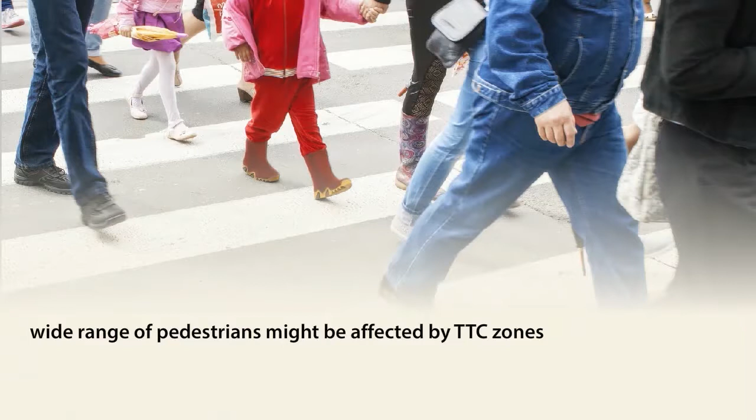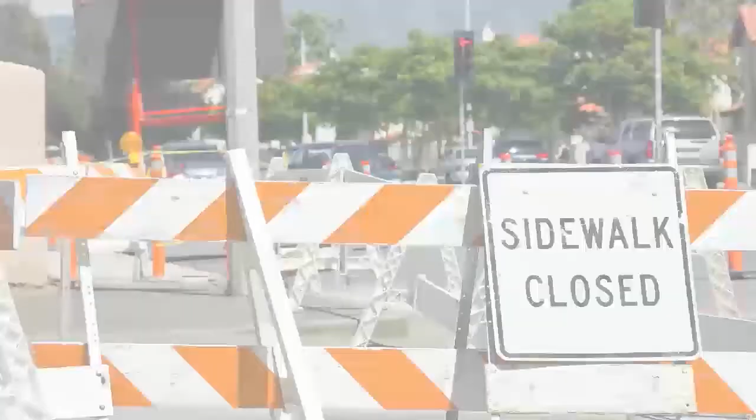A wide range of pedestrians might be affected by TTC zones, including the young, elderly, and people with disabilities, such as hearing, visual, or mobility. These pedestrians need a clearly delineated and usable travel path. The various TTC provisions for pedestrian and worker safety set forth in this course shall be applied by knowledgeable persons after appropriate evaluation and engineering judgment.

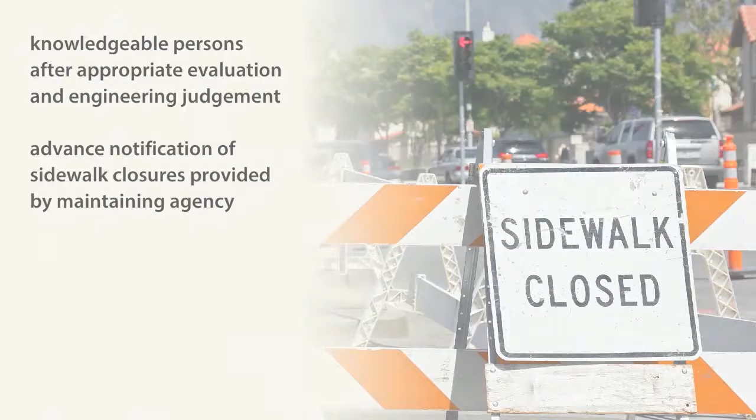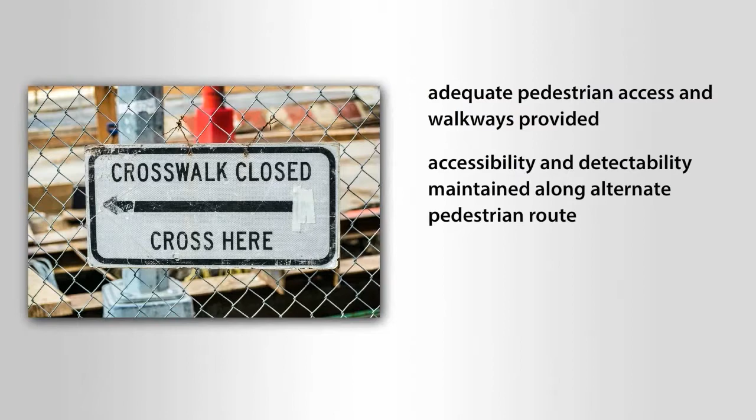Advance notification of sidewalk closures shall be provided by the maintaining agency. If the TTC zone affects the movement of pedestrians, adequate pedestrian access and walkways shall be provided. If the TTC zone affects an accessible and detectable pedestrian facility, the accessibility and detectability shall be maintained along the alternate pedestrian route. If establishing or maintaining an alternate pedestrian route is not feasible during the project, an alternate means of providing for pedestrians may be used, such as adding free bus service around the project or assigning someone the responsibility to assist pedestrians with disabilities through the project limits.

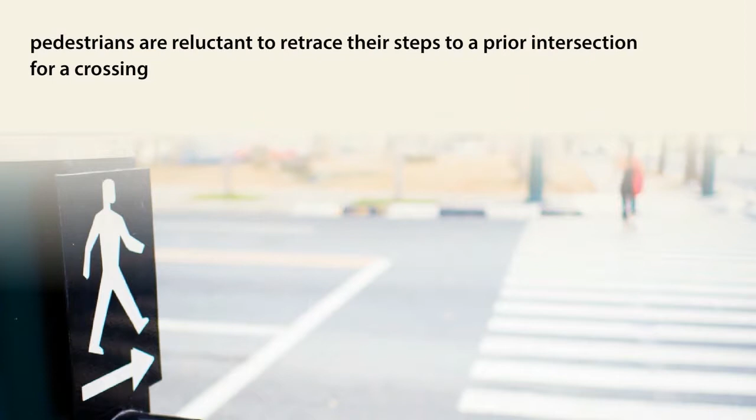It must be recognized that pedestrians are reluctant to retrace their steps to a prior intersection for a crossing or to add distance or out-of-the-way travel to a destination. The following three items should be considered when planning for pedestrians in TTC zones.

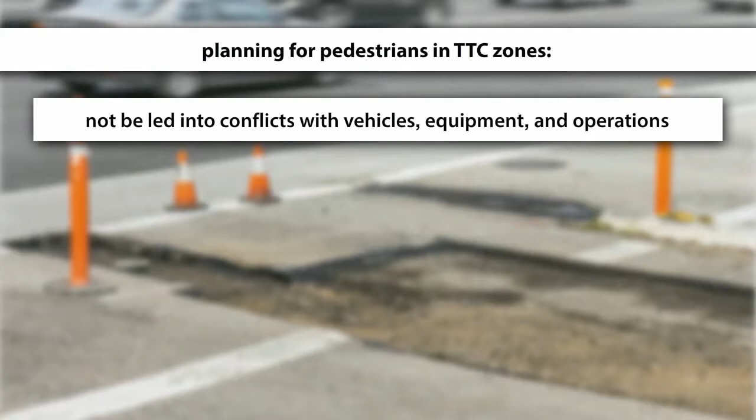One, pedestrians should not be led into conflicts with vehicles, equipment, and operations. Two, pedestrians should not be led into conflicts with vehicles moving through or around the worksite. Three, pedestrians should be provided with a convenient and accessible path that replicates as nearly as practical the most desirable characteristics of the existing sidewalks or footpaths.

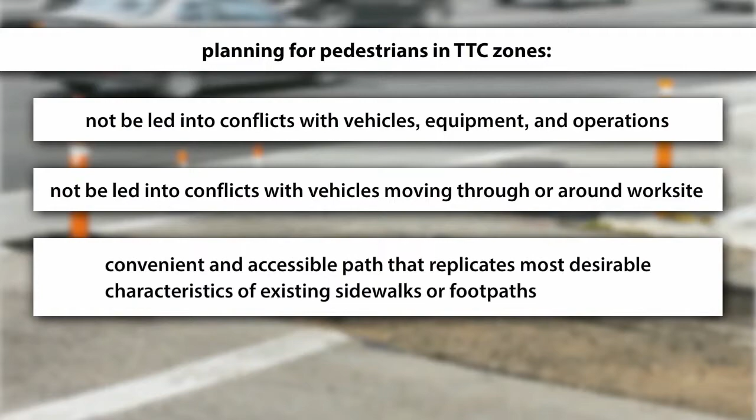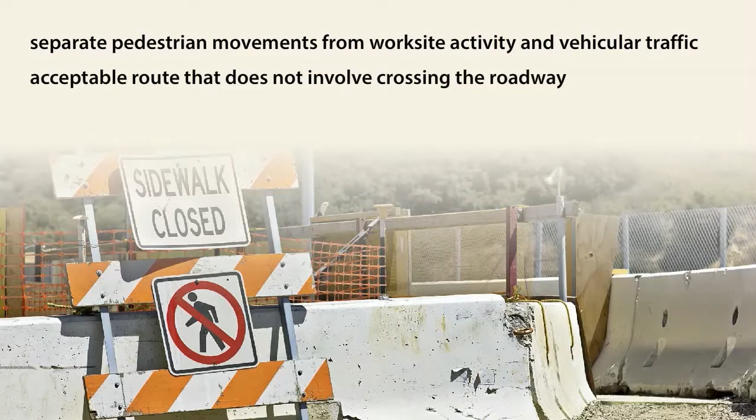A pedestrian route should not be severed or moved for non-construction activities, such as parking for vehicles and equipment. Consideration should be made to separate pedestrian movements from both worksite activity and vehicular traffic. Unless an acceptable route that does not involve crossing the roadway can be provided, pedestrians should be appropriately directed with advanced signing that encourages them to cross to the opposite side of the roadway.

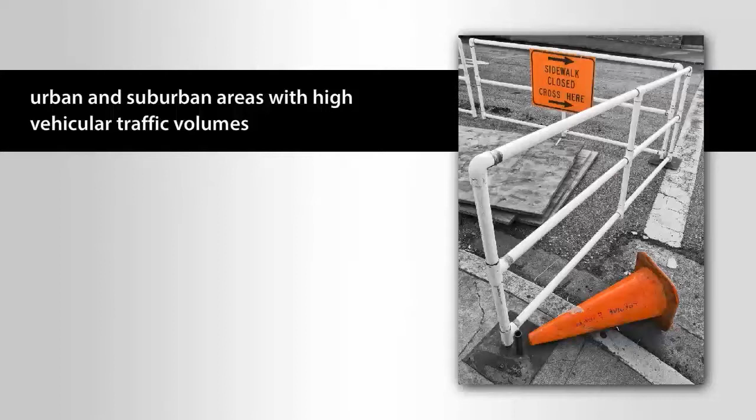In urban and suburban areas with high vehicular traffic volumes, these signs should be placed so that pedestrians are not confronted with mid-block worksites that will induce them to attempt skirting the worksite or making a mid-block crossing.

These figures show typical TTC device usage and techniques for pedestrian movement through work zones. You can press the Documents button to view these images in more detail.

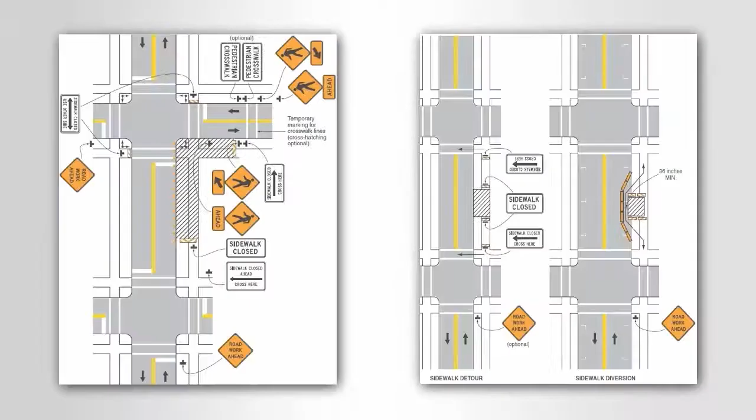To accommodate the needs of pedestrians, including those with disabilities, the following considerations should be addressed when temporary pedestrian pathways in TTC zones are designed or modified.

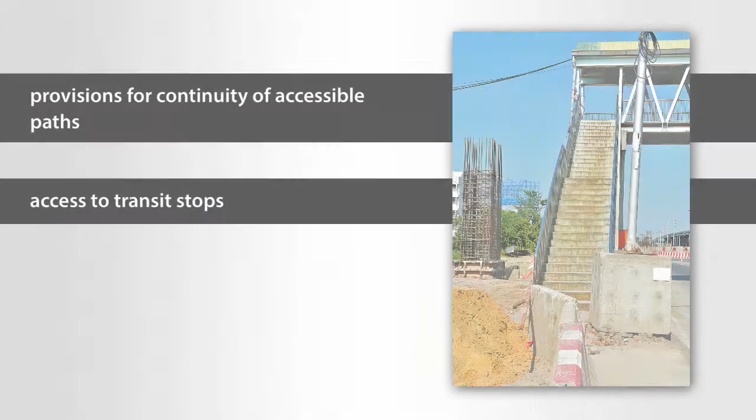A. Provisions for continuity of accessible paths for pedestrians should be incorporated into the TTC plan. B. Access to transit stops should be maintained. C. A smooth, continuous, hard surface should be provided through the entire length of the temporary pedestrian facility.

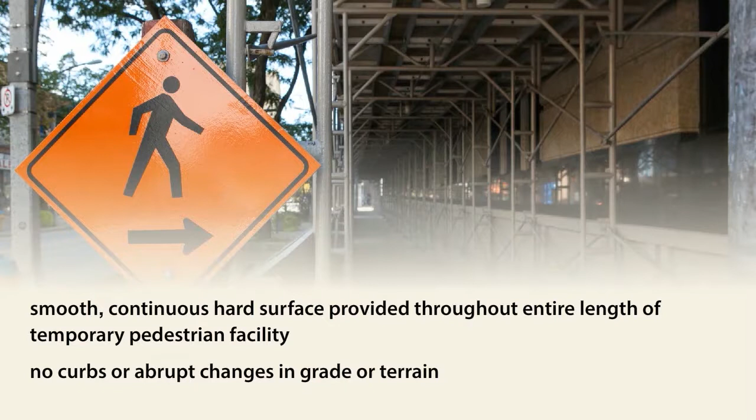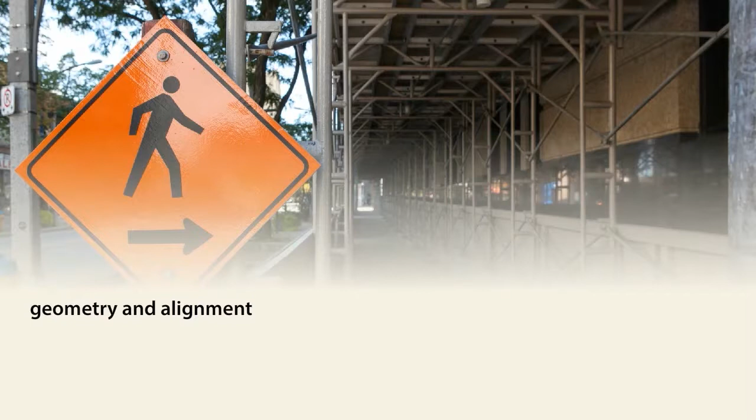There should be no curbs or abrupt changes in grade or terrain that could cause tripping or be a barrier to wheelchair use. The geometry and alignment of the facility should meet the applicable requirements of the Americans with Disabilities Act accessibility guidelines for buildings and facilities.

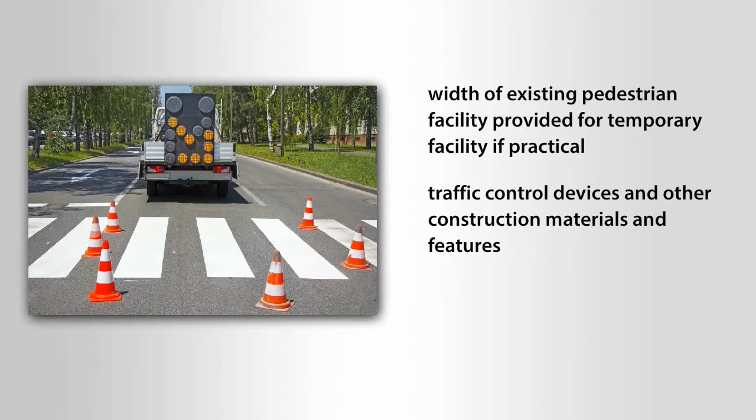D. The width of the existing pedestrian facility should be provided for the temporary facility, if practical. Traffic control devices and other construction materials and features should not intrude into the usable width of the sidewalk, temporary pathway, or other pedestrian facility.

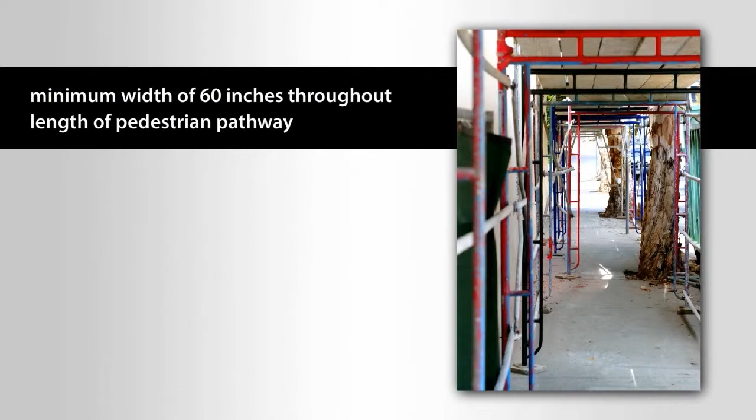When it is not possible to maintain a minimum width of 60 inches throughout the entire length of the pedestrian pathway, a 60 by 60 inch passing space should be provided at least every 200 feet to allow individuals in wheelchairs to pass.

E. Blocked routes, alternate crossings, and sign and signal information should be communicated to pedestrians with visual disabilities by providing devices such as audible information devices, accessible pedestrian signals or barriers, and channelizing devices that are detectable to pedestrians traveling with the aid of a long cane or who have low vision.

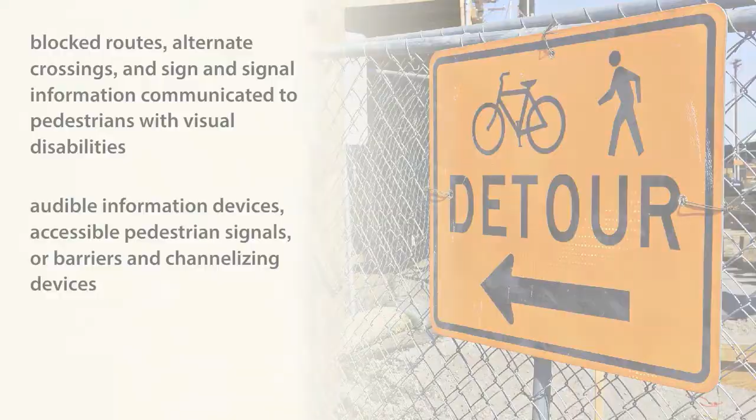Where pedestrian traffic is detoured to a TTC signal, engineering judgment should be used to determine if pedestrian signals or accessible pedestrian signals should be considered for crossings along an alternate route.

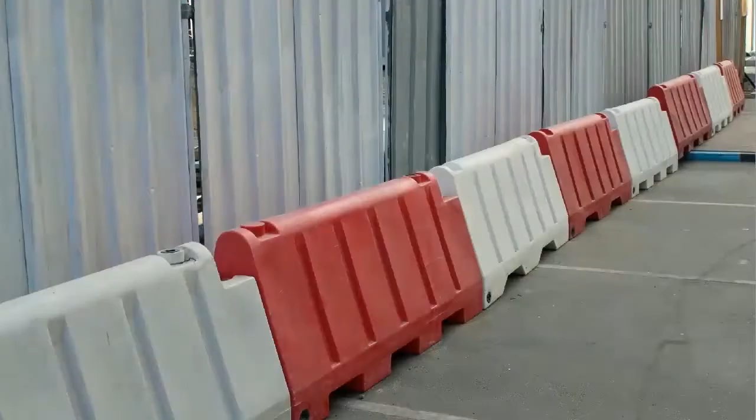When channelization is used to delineate a pedestrian pathway, a continuous detectable edging should be provided throughout the length of the facility such that pedestrians using a long cane can follow it.

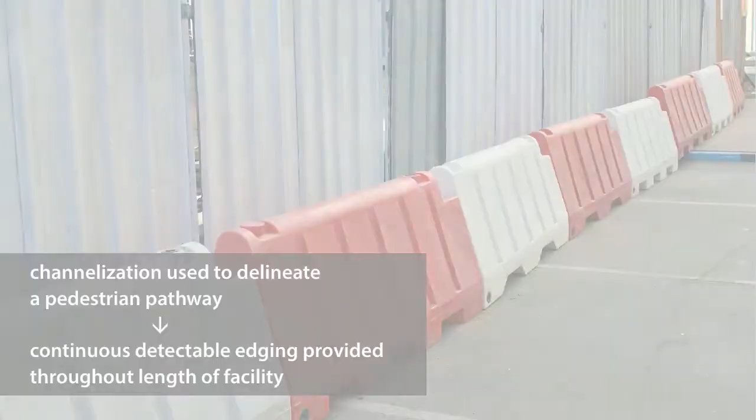Signs and other devices mounted lower than 7 feet above the temporary pedestrian pathway should not project more than 4 inches into accessible pedestrian facilities.

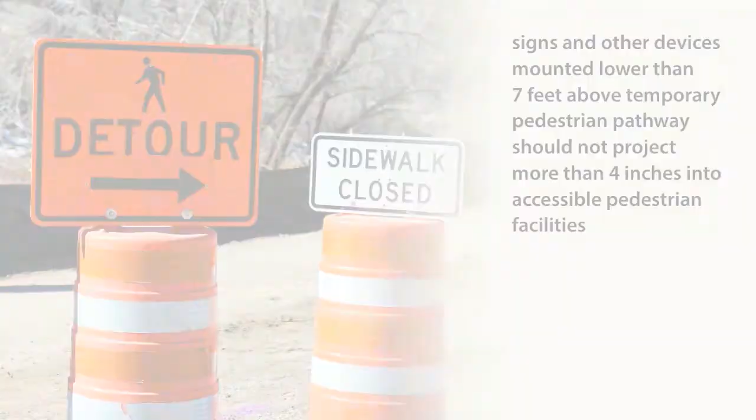Whenever it is feasible, closing off the worksite from pedestrian intrusion may be preferable to channelizing pedestrian traffic along the site with TTC devices. Fencing should not create sight distance restrictions for road users. Fences should not be constructed of materials that would be hazardous if impacted by vehicles.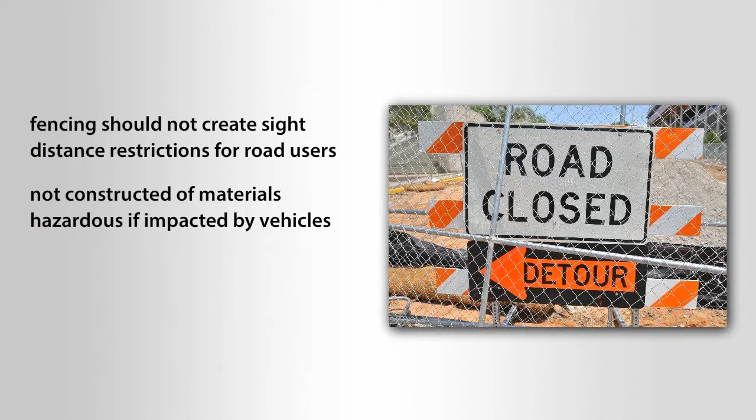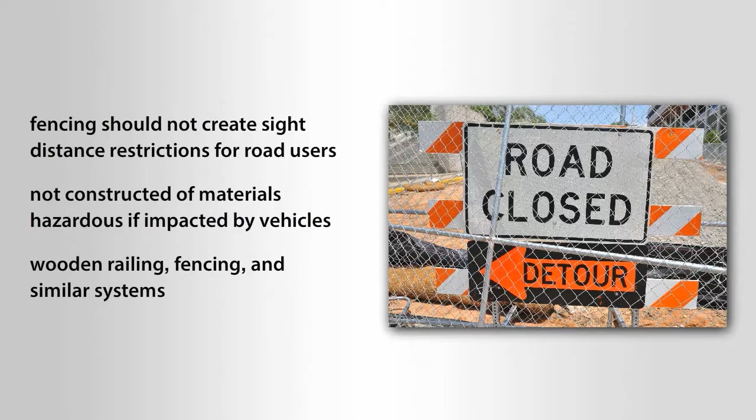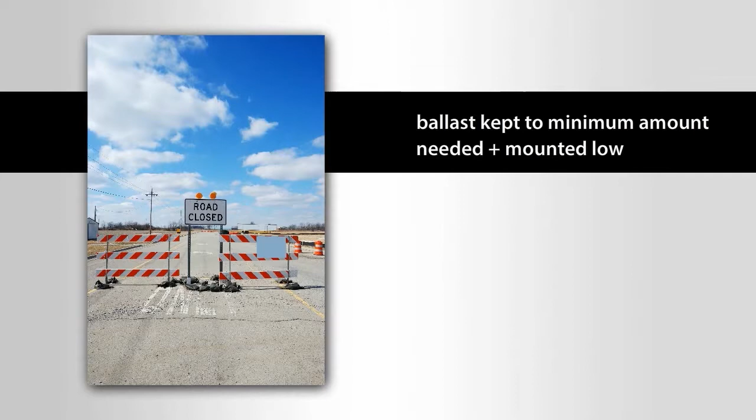Wooden railing, fencing, and similar systems placed immediately adjacent to motor vehicle traffic should not be used as substitutes for crash-worthy temporary traffic barriers. Ballast for TTC devices should be kept to the minimum amount needed and should be mounted low to prevent penetration of the vehicle windshield.

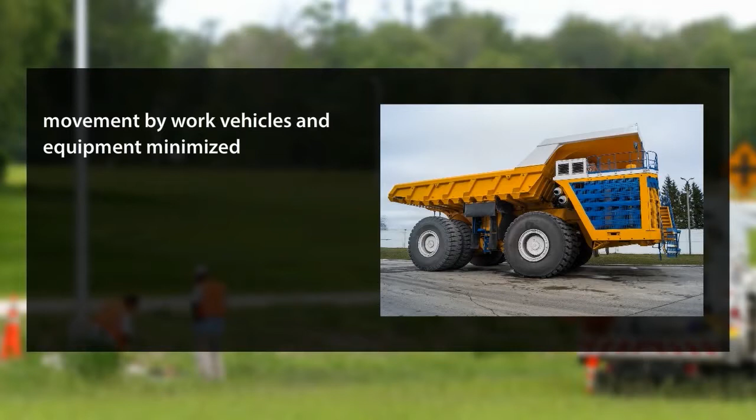Movement by work vehicles and equipment across designated pedestrian paths should be minimized and, when necessary, should be controlled by flaggers or TTC. Staging or stopping of work vehicles or equipment along the side of pedestrian paths should be avoided, since it encourages movement of workers, equipment, and materials across the pedestrian path.

Access to the workspace by workers and equipment across pedestrian walkways should be minimized because the access often creates unacceptable changes in grade and rough or muddy terrain, and pedestrians will tend to avoid these areas by attempting non-intersection crossings where no curb ramps are available.

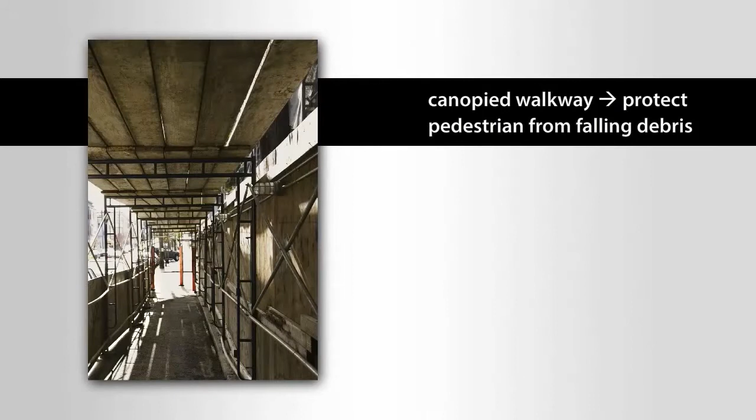A canopied walkway may be used to protect pedestrians from falling debris and to provide a covered passage for pedestrians. Covered walkways should be sturdily constructed and adequately lighted for nighttime use.

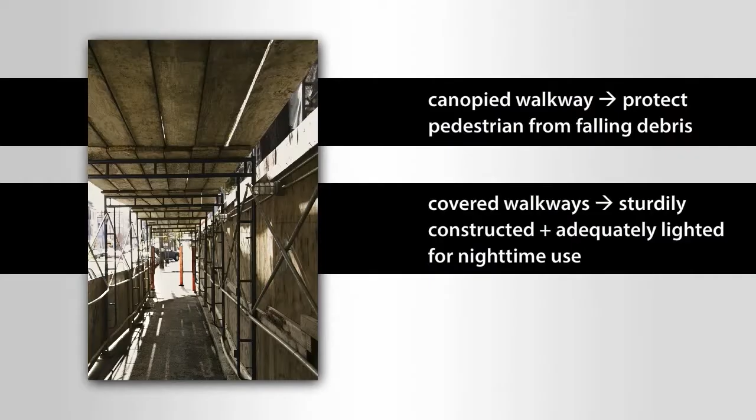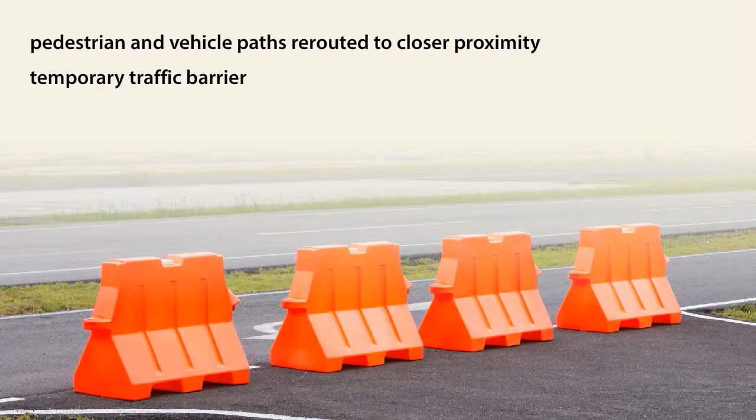When pedestrian and vehicle paths are rerouted to a closer proximity to each other, consideration should be given to separating them by a temporary traffic barrier. If a temporary traffic barrier is used to shield pedestrians, it should be designed to accommodate site conditions.

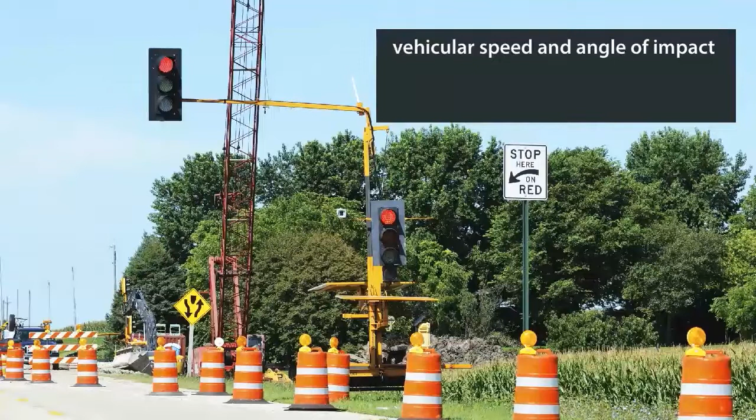Depending on the possible vehicular speed and angle of impact, temporary traffic barriers might deflect upon impact by an errant vehicle. Guidance for locating and designing temporary traffic barriers can be found in Chapter 9 of AASHTO's Roadside Design Guide.

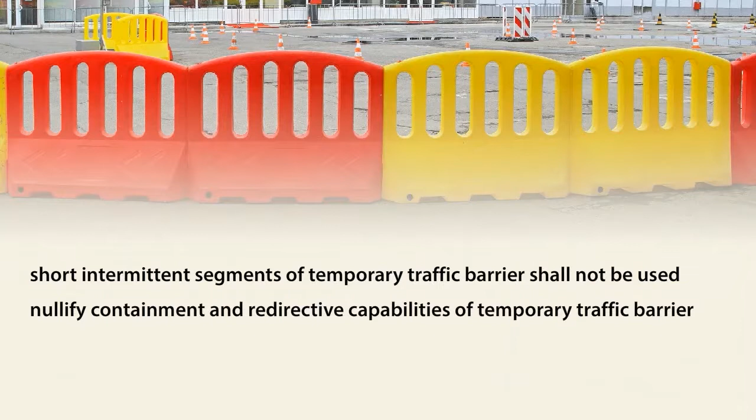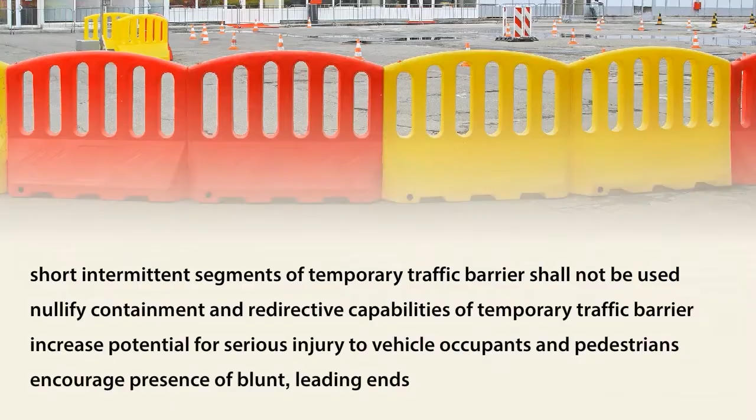Short, intermittent segments of temporary traffic barrier shall not be used because they nullify the containment and redirective capabilities of the temporary traffic barrier, increase the potential for serious injury both to vehicle occupants and pedestrians, and encourage the presence of blunt leading ends. All upstream leading ends that are present shall be appropriately flared or protected with properly installed and maintained crash-worthy cushions.

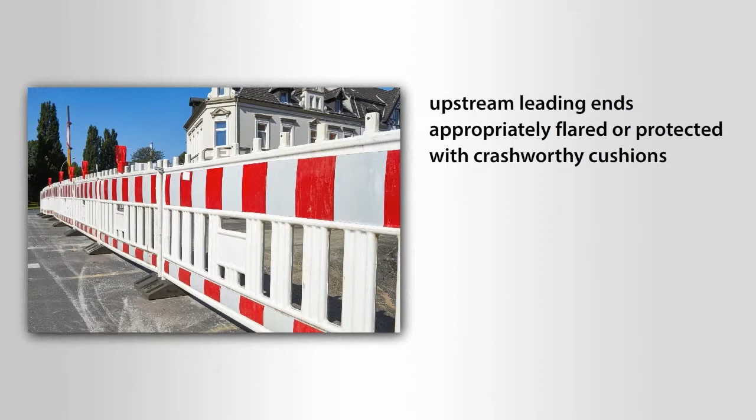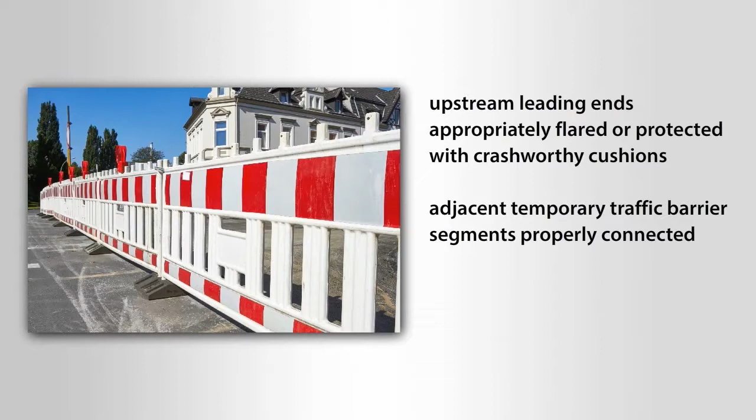Adjacent temporary traffic barrier segments shall be properly connected in order to provide the overall strength required for the temporary traffic barrier to perform properly. Normal vertical curbing shall not be used as a substitute for temporary traffic barriers when temporary traffic barriers are needed.

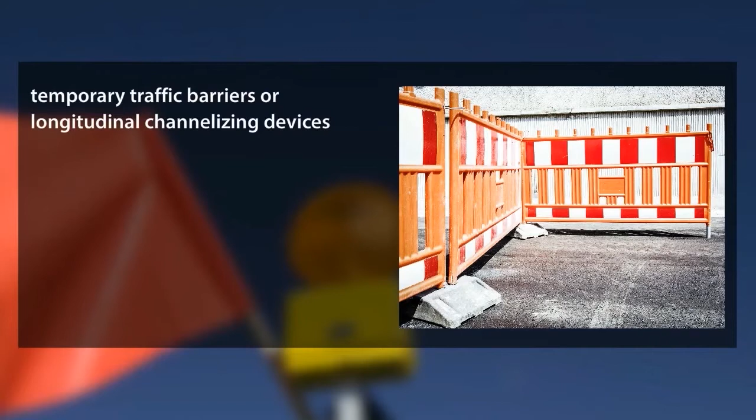Temporary traffic barriers or longitudinal channelizing devices may be used to discourage pedestrians from unauthorized movements into the workspace. They may also be used to inhibit conflicts with vehicular traffic by minimizing the possibility of midblock crossings.

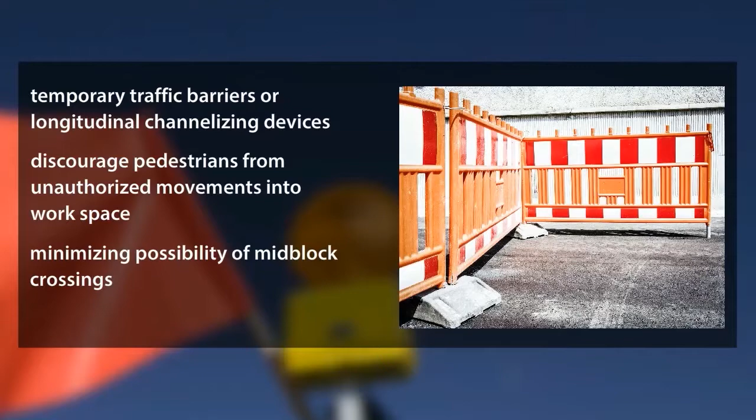A major concern for pedestrians is urban and suburban building construction encroaching onto the contiguous sidewalks, which forces pedestrians off the curb into direct conflict with moving vehicles.

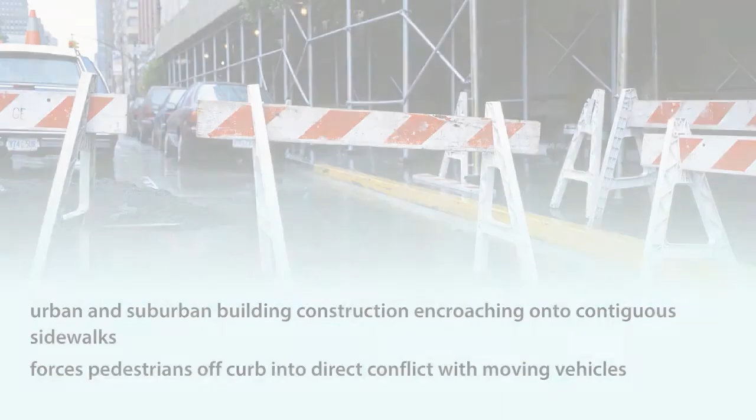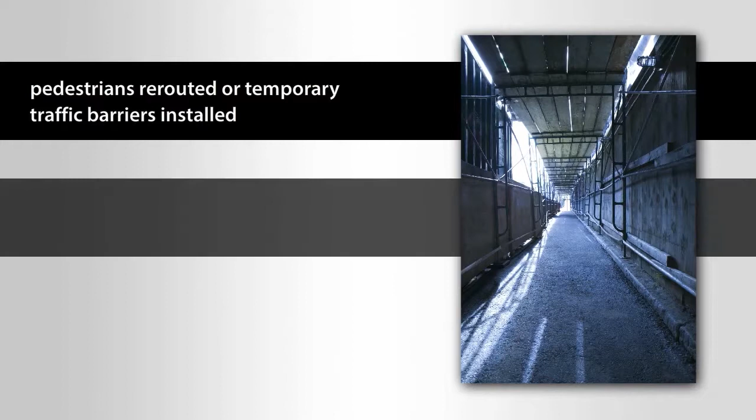If a significant potential exists for vehicle incursions into the pedestrian path, pedestrians should be rerouted or temporary traffic barriers should be installed. TTC devices, jersey barriers, and wood or chain link fencing with a continuous detectable edging can satisfactorily delineate a pedestrian path.

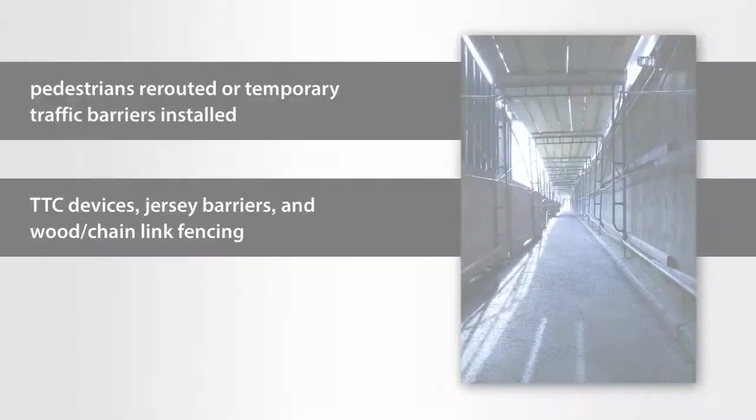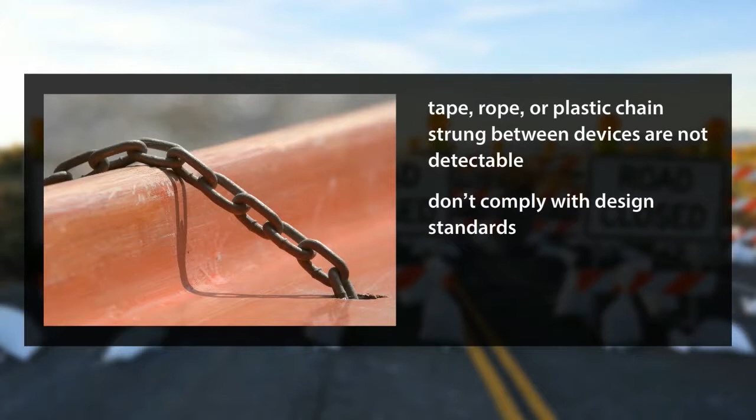Tape, rope, or plastic chain strung between devices are not detectable, do not comply with the design standards in the Americans with Disabilities Act accessibility guidelines for buildings and facilities, and should not be used as a control for pedestrian movements.

In general, pedestrian routes should be preserved in urban and commercial suburban areas. Alternative routing should be discouraged.

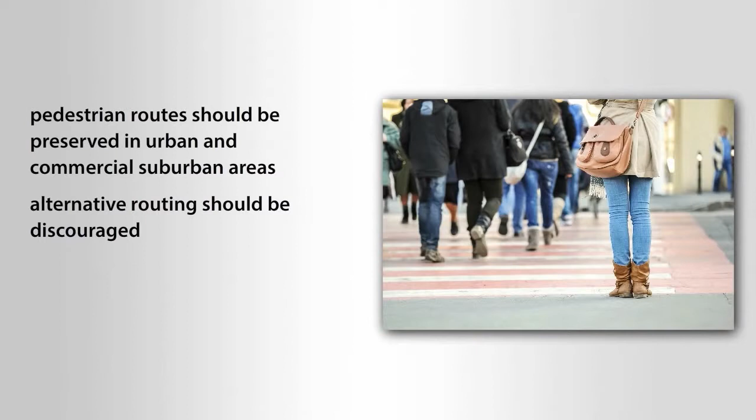The highway agency in charge of the TTC zone should regularly inspect the activity area so that effective pedestrian TTC is maintained.